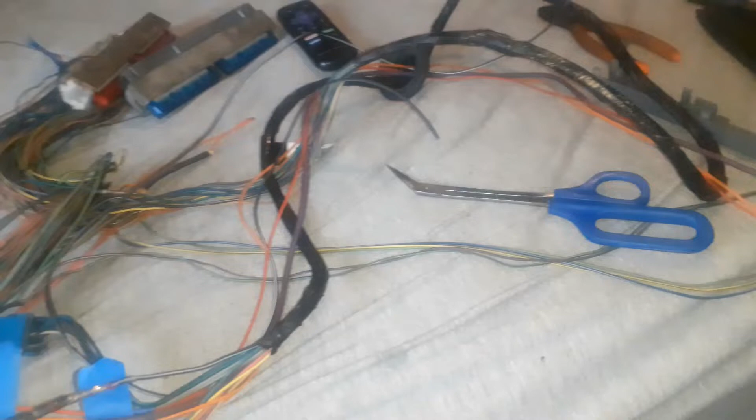Alright, so we're converting a 99 through 02 Camaro harness to work with a 96 LT1 Camaro.

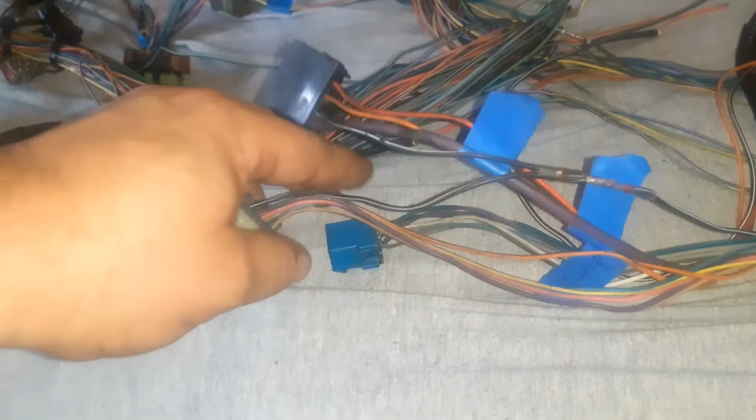Now, to get this to work, the LS harness only has 2 plugins. The LT1 has these plugins plus a black one underneath the dash. So you're going to have this black plug-in. I still had my LT1 harness, so I just took it off there.

So on the LS1 harness, there's this big purple wire, the starter wire. On the LS1 harness, it ran from the starter solenoid up to above the strut tower, shock tower, wheel well on the passenger side, up by these 3 plug-ins. It had its own plug-in that went to the engine bay fuse box, from what I'm assuming.

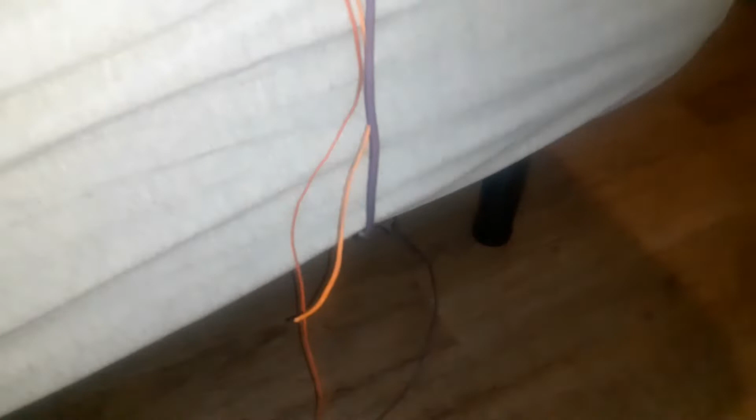That's not how the LT1 works. The LT1, the starter comes out from below the dash on this connector, which is pin A. I forget what that connector is called, but anyway. That purple wire goes straight to the starter solenoid. It comes up and around and down, and it goes straight to the starter solenoid. I just took it off my LT1 harness.

Now, there's a ground. This is the ground for the fuel pump. It just needs to be grounded, it doesn't matter where, but I just ran it in line with this ground. I don't know what that ground's for, it doesn't tell me, it just tells me it's a ground on the pinouts that I've looked up online.

Now there is a fuel pump relay. This is a fuel pump relay too, but on the LT1, it just went over to the strut tower, shock tower, wheel well on the passenger side and just hung out, so you could manually prime the fuel pump. This little thing right here is cool and good to have for trying to figure out fueling issues. So I'm going to keep that.

Now this orange one in pin C, this is the PCM bat. This is from the PCM bat fuse. It fed to the LT1 computer to feed it 12 volts.

So I grounded the fuel pump right there, I just grounded it with this one. All those grounds come up in this harness and they all meet, like right here. See, and they meet in this block and then they come out as one wire. There's even one wire coming out this side and going back. I don't know why they did that, but these grounds come up and then they go to these grounds that go to the back of the head. There were 3 of these.

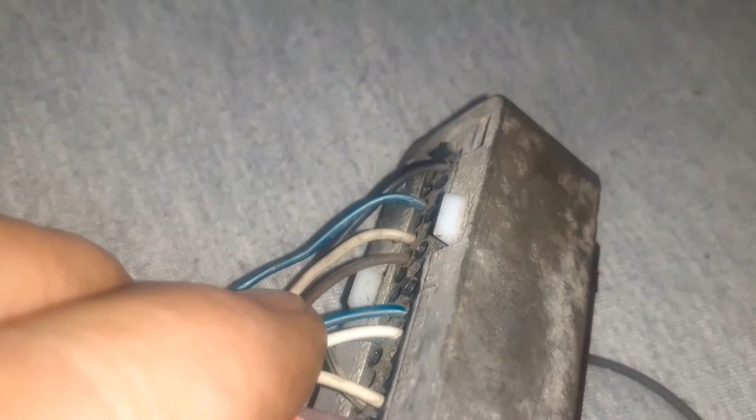All right, now, so to power the fuel pump, there's red pin 9, which is that green and white wire up beside the white one. It comes over here to pin D on this C101 connector that's on the LS1 harness.

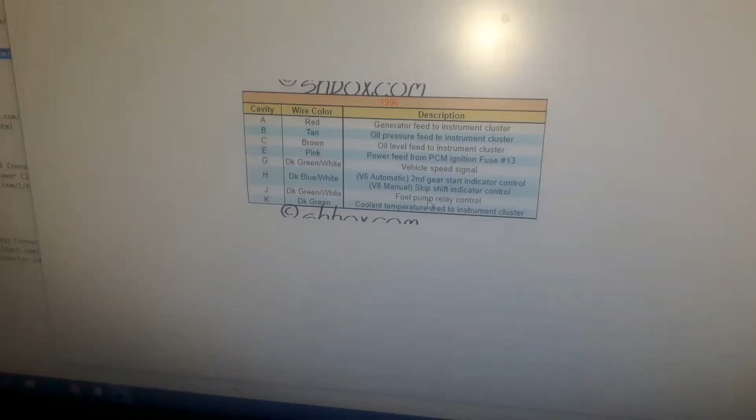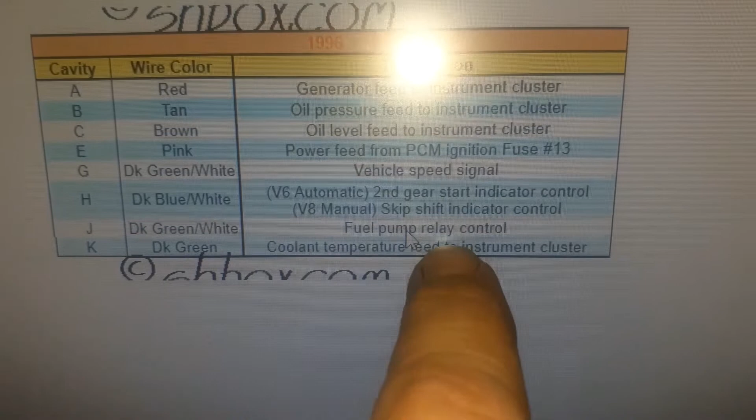So we need to take that wire, and it needs to come down to this wire. And let me see what our pinout says. One moment. It says it needs to go to C220, which is the white one. Dark green and white, J, fuel pump relay control.

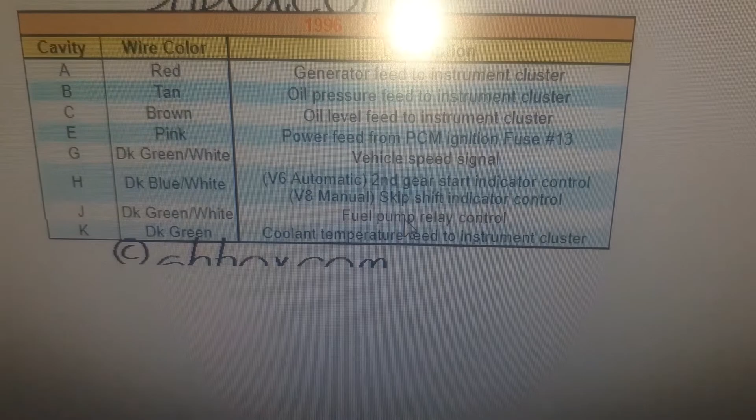So that's where we're going to send it. White J. Alright, so this is the C220, the white one. So we find J, and we're going to run this red pin 9 that goes to D, and C101, we're going to run it to J in this white connector.

So the J was the yellow with the black stripe. I found it on the under end of the harness. It's actually the only yellow wire in the bunch. So I found it coming out the other end right here, which is just all the harness. It wraps back out and all of them come out right there. So all these wires here, and this white and blue are all these wires right here.

So now this also went to C101. It went to one of the anti-theft things or something like that. And this is pin 9 from the red connector. So we're going to put those together, and that's going to match this up with the fuel pump relay. That's a fuel pump relay control. This one's a fuel pump relay control too. That red one. But yeah, let's connect those together real quick, and then we'll go to the next step.

Alright, C220 connector, white connector, J goes to pin 9 on the red connector. And both of these, pin 9 went to C101 originally, and so did J from the C220 went to C101. But all you need to know is pin 9 to white connector J.

And when you're doing the alphabet on these, because this plug-in gets in the way, this latch for the plug-in gets in the way, there is no I. So it's A, B, C, D, E on this side, and then F, G, H, J, K. So that's J. And then, yeah, let's see what's next.

I already found the oil pressure wire. So this one comes down, and we're going to try to find it down here. It's a light tannish brown wire. There it is. That's the only one right there, which is, let's zoom in on this. I can't see. That should be pin A. It is. So pin A. Alright, and we're just going to confirm that.

Something I wanted to mention here real quick. When you see these black diagrams right here, these are the diagrams for the LS harness itself. You'll see some pictures of just like this, but they're in solid white. Those are the ones for the LT1 car, for the car itself, the plugins under the dash and the ones on the shock tower and stuff like that. The main thing of this is you want to line up the LS harness with what's on the car so everything works right.

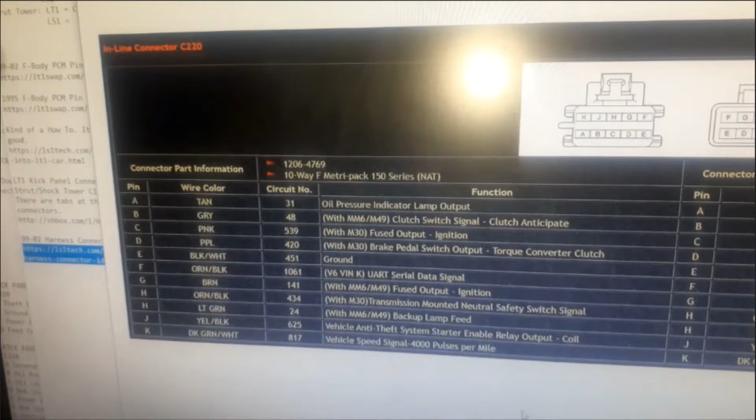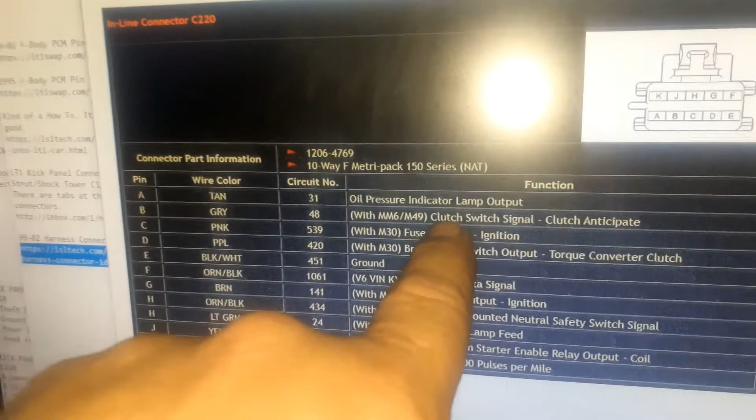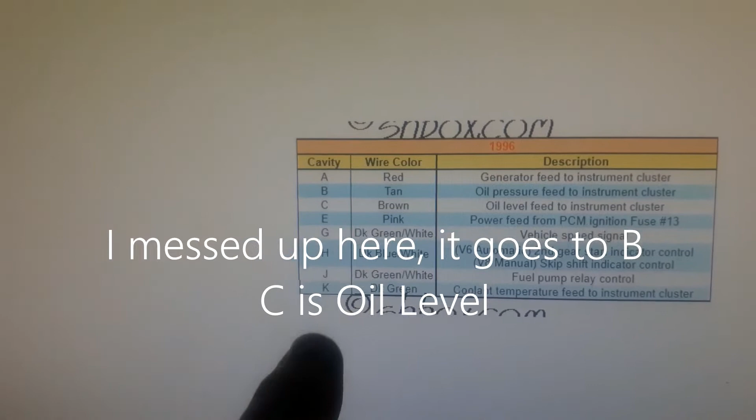C220, 10, oil pressure indicator lamp output. So we need that one. This is the C220. Let's turn this light off, that might help. So we need C220 oil pressure feed instrument cluster right there. We need to go that.

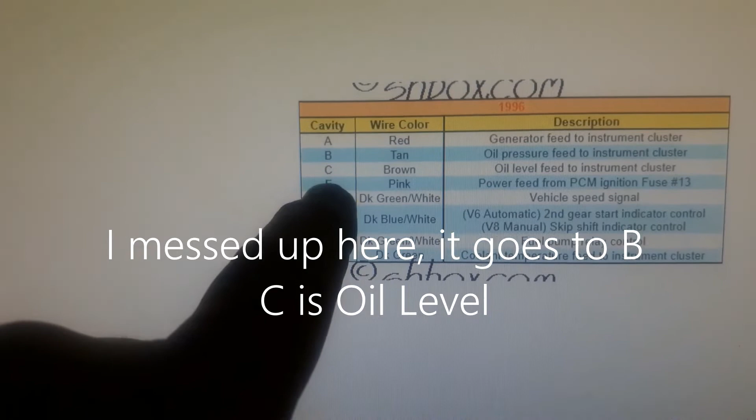We need to get that to go to C. So we need to move that from A to C, because that's the generator. So move that from A to C. Yeah, see, oil level feed to instrument cluster. Move A to C. Alright, since we're going to move this, we're just going to repin it. We're going to pop A out, pop C out, and flip those, or put A and C for now anyway.

Now to repin these, you got to take this gray thing off the top. There's little clamps on the side that you push in right here. Look, push in, disengage that, push this side in, it should pop out. So I'll push this side in, push this up, then push this side in, push that up, and that should. The lip is on the left side, so we need to push down on this left side, unclip it off that lip, see the lip in the blank hole, and then we can pull it through.

So I'm going to put a toothpick down in there, and I'm going to push it forward a little bit, and I'm going to push the toothpick down, and then I'm going to pull it back through. And I'm going to move A to C, which is our oil pressure. And then I don't know what we're going to do to C for now, but we'll figure that out later.

Alright, so now you get a better idea how that latched. I had to use a sewing needle. But there's the latch right there where my finger's pointing. And then down the big hole goes the prong from the other connector.

We're going to stick that in tan and C. So I messed up on the tan one. C is actually the oil level sensor, B is the oil pressure, so we need to move that over to B. Tan to B. Where do we take it from? A? Yeah, we took it from A, so oil pressure goes from A to B.

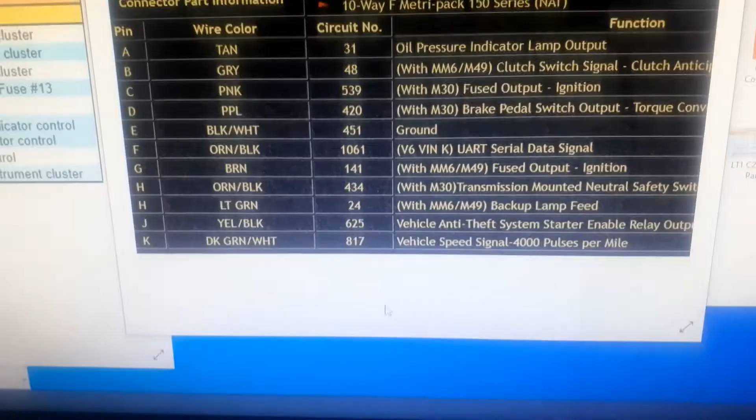My bad. Alright, we're still looking at the white under the dash connector, C220. And you'll see right here, dark green white, vehicle speed signal. Dark green white, and then over here, vehicle speed signal. So we need that to go to G. So K to G. And G is empty on this one, so we'll just take out K and move it over to G.

I really need that app where you can record your computer screen, but anyway, I took screenshots of all the connectors, C100, C101, C105, C220, and C230 for the LS, and then down here for the LT1, I took a screenshot, and this come from lt1swap.com. This come from shbox.com, shoebox, and I took a screenshot of the C100, C105, C210, C220, and C230 connectors.

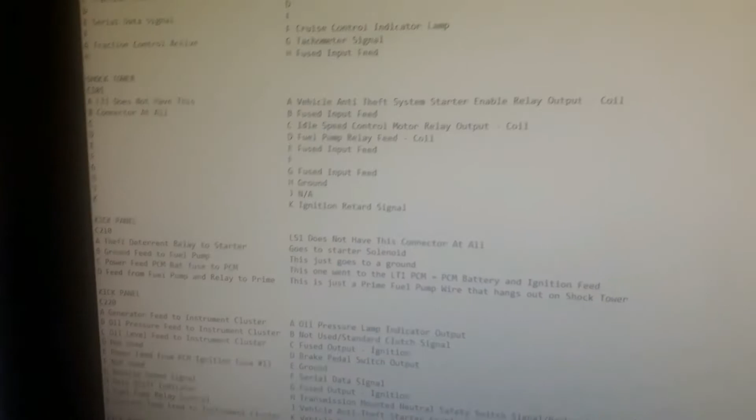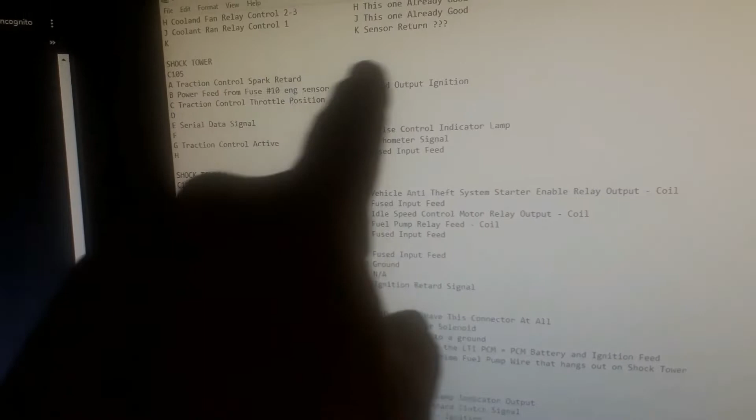And then, well, I know y'all can't see that, but then what I did was I made this little chart. So the left column's LT1, the right column's LS1. So C105, LT1, C105, LS1. I couldn't find the tach signal, so what I did, and I did that for all these connectors all the way down through here, was I did Control F and then typed in tach, and then boom, there we go.

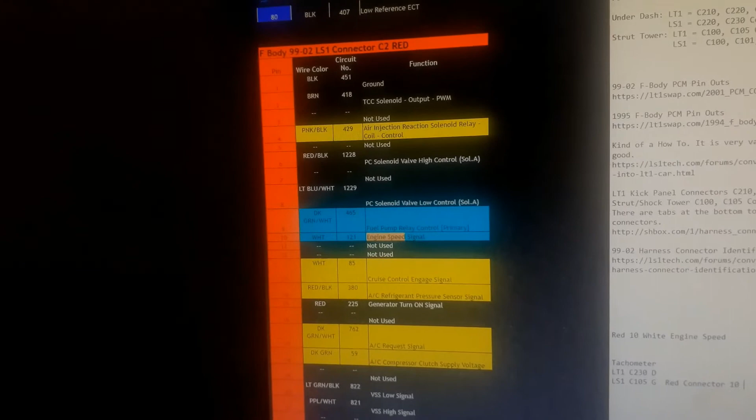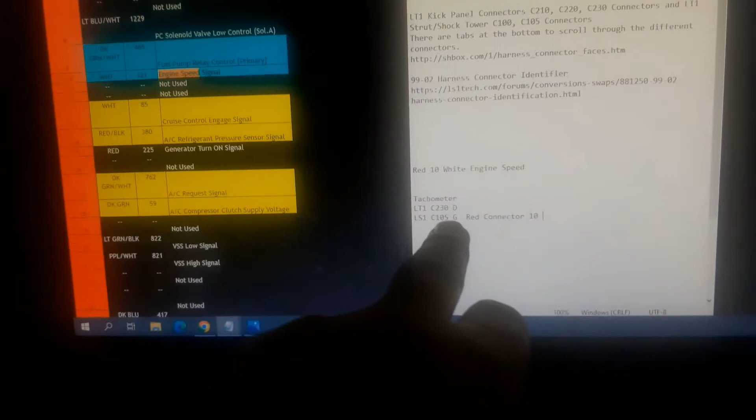And then I got the pinouts for the LS harness here. So it looks like red connector 10 is the engine speed signal. And then that goes to the C105 shock tower connector G. See if we can focus on that. And then it's red connector pin 10. So it goes from red connector pin 10 on LS1, then it goes to the C105 G.

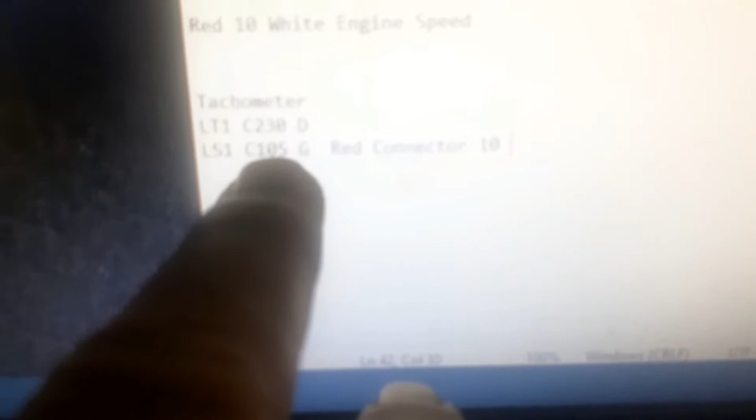So we need to take that out and run that to under the dash to C230D, which is the blue connector. So if we look at the red connector, and everything's always upside down, there it is. Red connector 10, it's supposed to have been a white. So that should go over to C105, and then we'll grab that and we'll trace it over and see if it does go to C105.

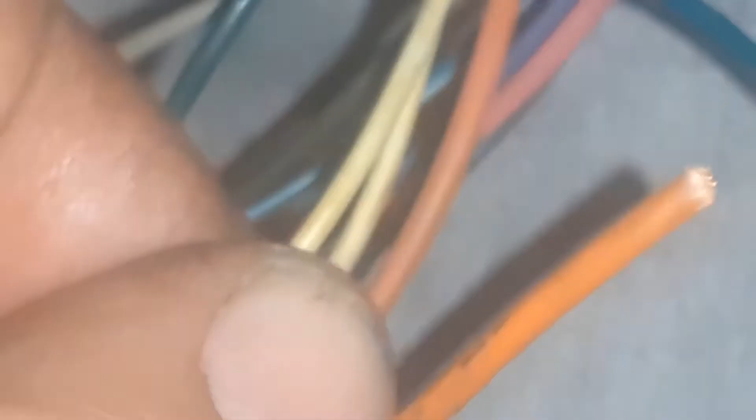Now I mark these right there, C105. There's two white connectors on here, but it was pin G, I believe. Is that what we said? Yeah, right there, pin G. So that one needs to run down to this blue connector.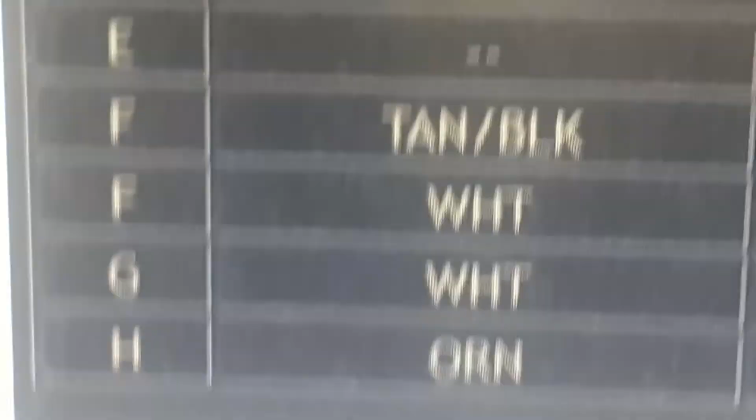And all these screenshots I took, this is the C105 connector for the LS. Right there, tachometer white G. And then the screenshot for the C230 blue on the LT1 under the dash harness. Where did it go? Right there. Tachometer instrument signal D, which is a white wire.

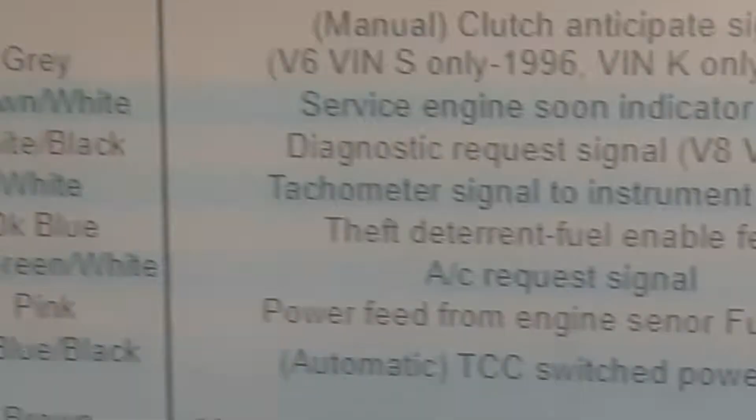So D white wire needs to go over to G on this one. Right there, G. We're just going to cut it right here. Alright, we just cut it out, because those pins ain't going to fit the other pins. I wouldn't think they would anyway. They might, it doesn't matter, the wire's not long enough.

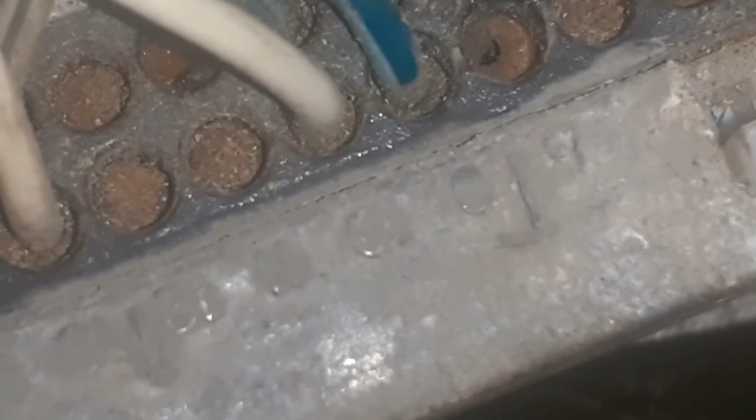But anyway, that's number 9. Just gotta check, and double check. It won't focus. Well, it focused for a minute. Number 9, or number 10. It was number 10, I'm sorry. Alright, so we got that.

Now we need to find the white connector in this one, and then trace it back, and we'll find it up here, where it comes out up here. And then we'll just splice it in here, it's just a little bit easier.

Alright, so the LS1 blue connector didn't have a pin D, so I took it out of my LT1 harness. And then red connector 10 right there. And then we're going to run this around from the blue connector D and hook it to that one, to red pin 10.

And that's for the tachometer signal. Alright, next thing to do is the engine coolant temp sensor.

Supposedly the 99 through 02 sensor reads differently than a 98 down. It just reads in a different way. On 99 through 02, it goes through the body control module or something like that. Anyway, a 98 down, and especially my 96, doesn't read that way.

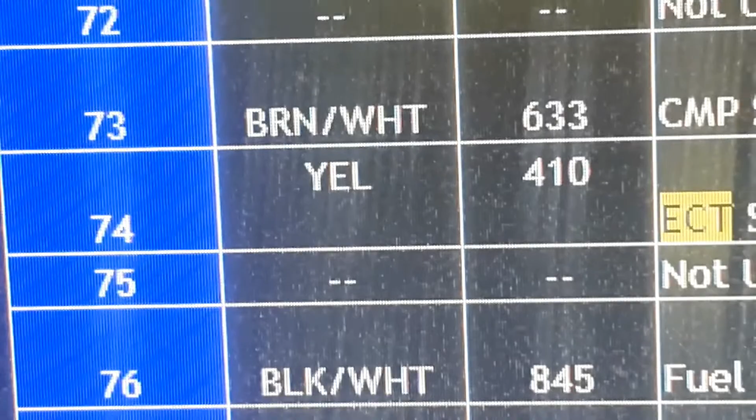Alright, so we trace that wire back, and that's 71, 72, 73, 74. It's that yellow wire right there. So that would be 74. Now let's look at the pinouts and see if that's in fact the engine coolant temperature. And then there we go, 74 yellow, engine coolant temp sensor signal.

So we have in fact confirmed that this is the engine coolant temp sensor, and I've already confirmed that, but check and double check. So we're going to go ahead and cut this one.

We're going to find A and B, get the 3-prong, line these wires back up with A and B, and then run a separate wire out of C. I'm just checking these off the old connector. So black is A, yellow is B.

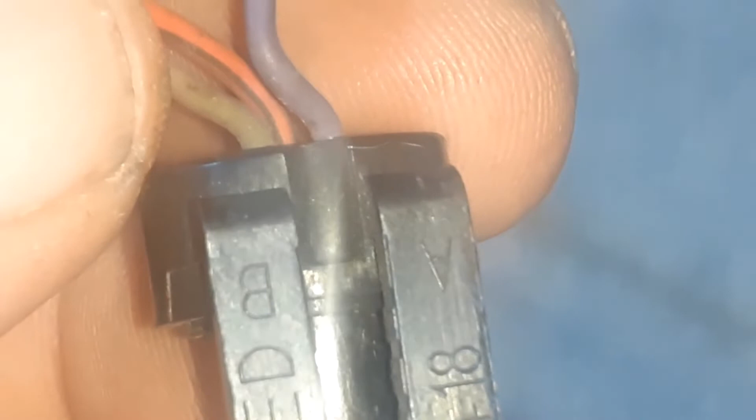Then on our new connector, B is this, I don't know what color that is, but it's this one right here. I just use these little connectors. I got these at Summit, but you just put one wire in this end, one wire in this end, make sure the wires overlap under this right here, the solder part where my thumb's at, and I just heat it up with a lighter, or you can use a heat gun, but I just use a lighter, and it melts all this, and it wraps the wire and solders it at the same time. Pretty cool.

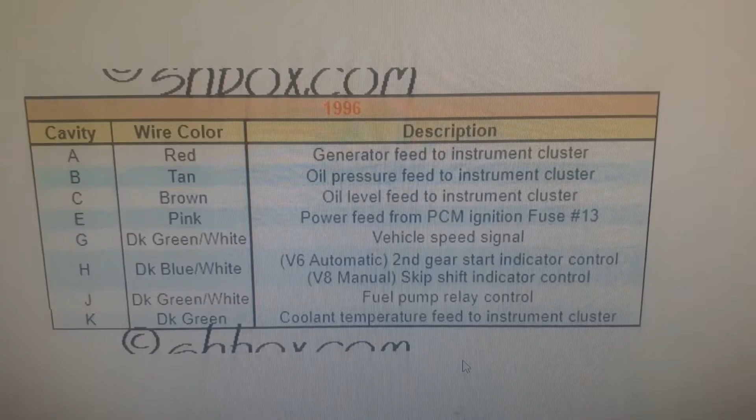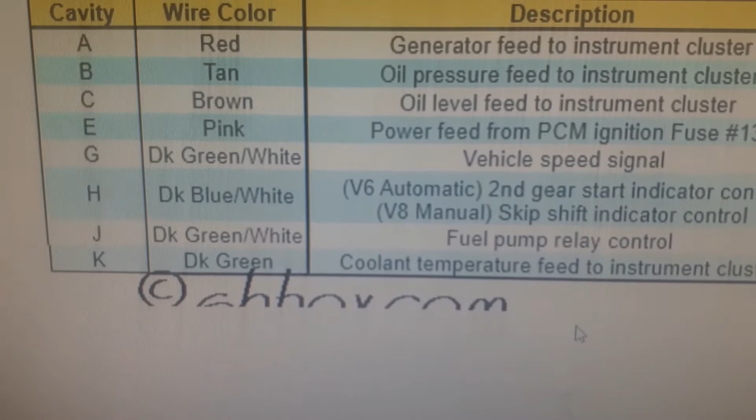And then looking at our pinout from shbox.com, short for shoebox, it looks like coolant temperature feed is K on C220, which is the white one. So we need to run that C from the engine coolant temp connector all the way down to the white K. So I'm going to have to grab some wire for that.

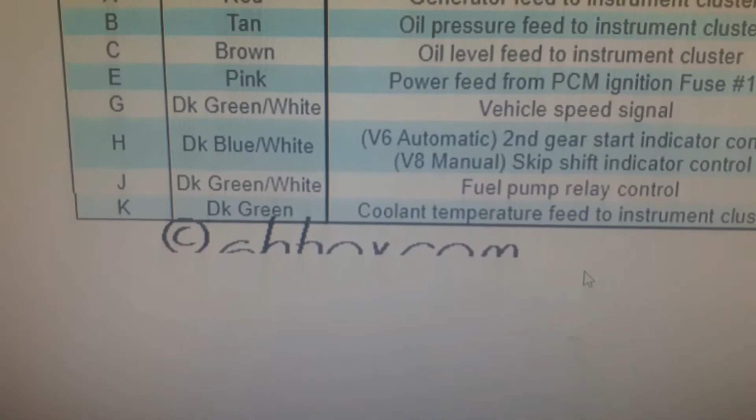Alright, so the C from the engine coolant temp sensor plug-in, that 3-prong that we put on, it's got to come all the way back here to K on C220. Now the LS1 C220 does not have a K.

So I stole this one off of the LT1 harness. So if you guys don't have a spare LT1 harness when you're doing this, you're going to have to get some of these. This is like 22, 24 gauge wire, and you're going to have to get some of these pins that fit these C220 and C230 connectors.

But anyway, I made the wire long enough that it's going to come all the way around. I had to use a couple of different wires because I'm just using leftover stuff from what I took off of this harness and from the LT1 harness.

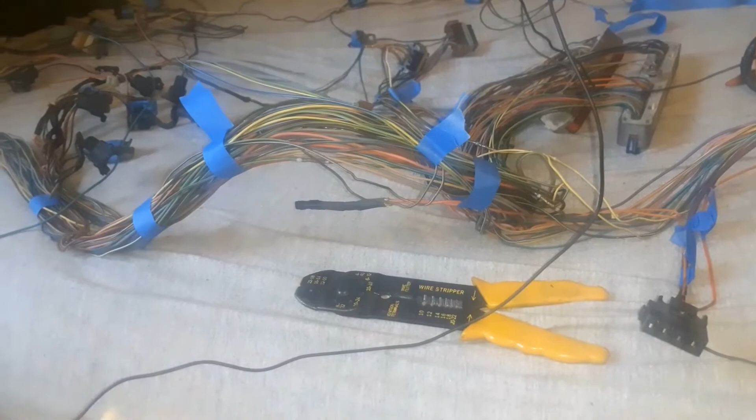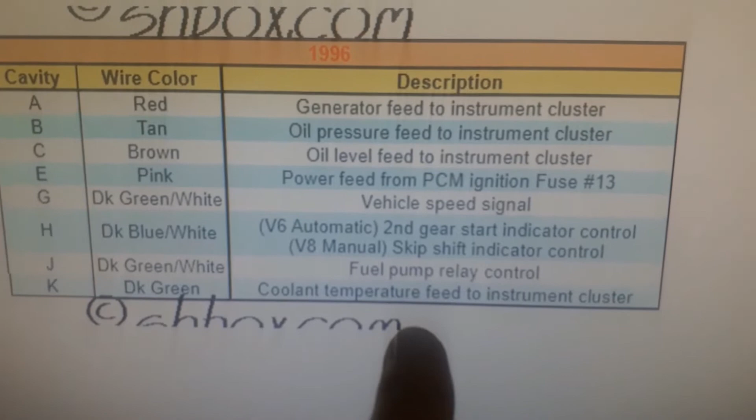So I'll put this in K. See, just cross-referencing K, coolant temperature feed to instrument cluster. So this is K under the dash, so we need to line it up with that one.

All right, we got that all wired in.

3-prong connector for engine coolant temp sensor. It looks like that: A to A and B to B from what was already on there, and then C at the bottom. You run all the way back around, down through here, back down to here, and then white C220K. Alright, that's the engine coolant temp sensor.

Alright, on the alternator wire, it's this red one. It comes all the way back around, and then it goes to red 15 on this connector. Now this one you have to splice into it because it still has to go to the computer, but it also needs to go to C220 pin A.

So we're going to run C220A and splice it into here. So it's going to go to the computer, to the connector on the alternator, and it's going to go down to C220 on A.

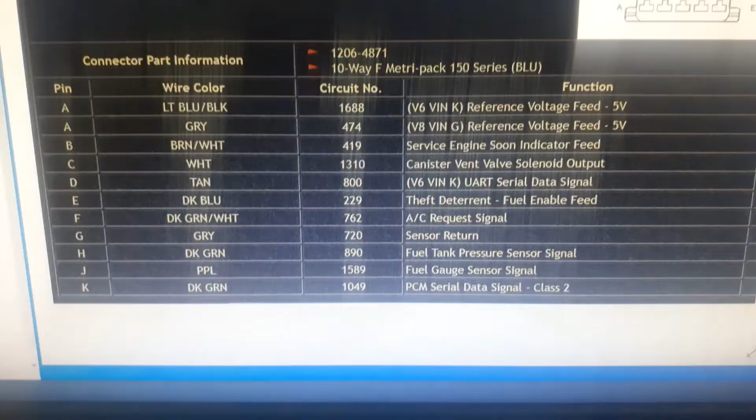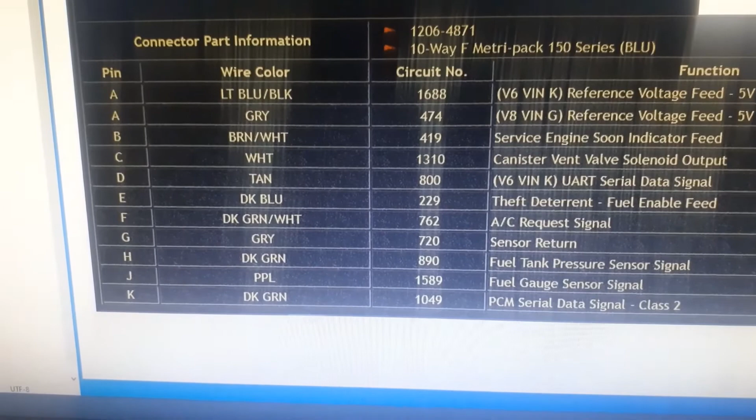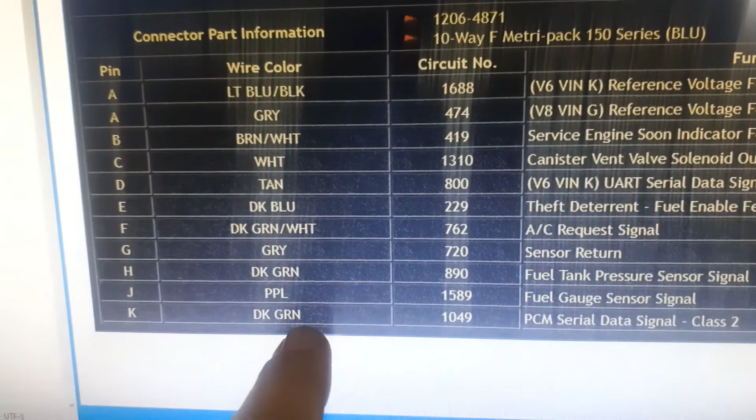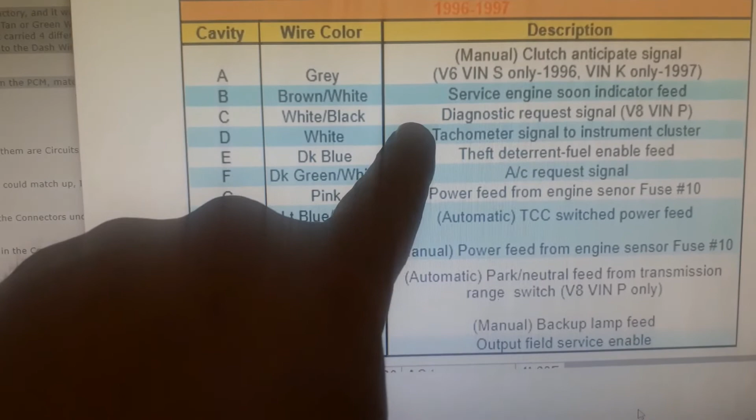Out of the blue connector on the PCM, 58, that's your serial data wire for your OBD diagnostic port to work. Now the 95, 96, and 97 LT1 have the OBD2, so you're pretty much set up on that except for this one wire. It goes from blue PCM connector 58, and then it comes to C230K. But now on the LT1, we need that on C230C. So we need to move K to C.

Alright, so blue connector PCM 58, I moved down here to C230 on connector C. There was one already plugged in there, so that was just for the emission stuff, so we'll leave that off.

Alright, so blue connector, these orange wires 20 and 57, they need to go to a constant power source. If you wire those around, it comes to this block. It comes out of this block and it goes up to C101.

So those need constant power. The only constant power I know is this PCM battery wire that went to the LT1. It went to 2 different spots: this orange one to power the PCM off this black connector that goes under the dash, the orange wire. So I'm going to cut this wire out that went to 20 and 57.

Alright, so basically what we're going to do here is we're going to run C210 black connector, pin C. We're going to run that up to blue connector 20 and 57. But like I said, these go together and then go over to this block and then come out and go up to this C101 connector right here.

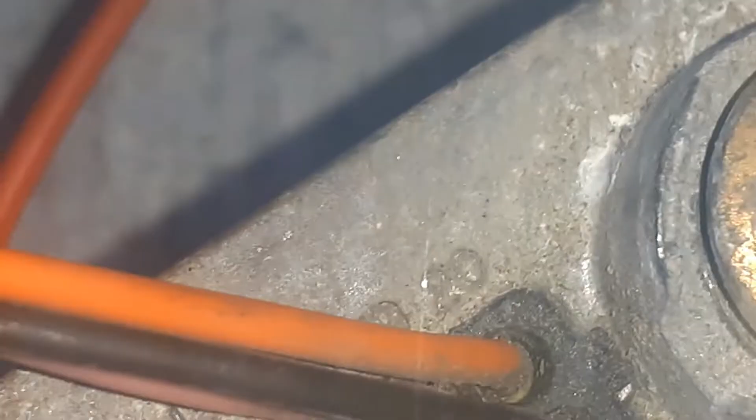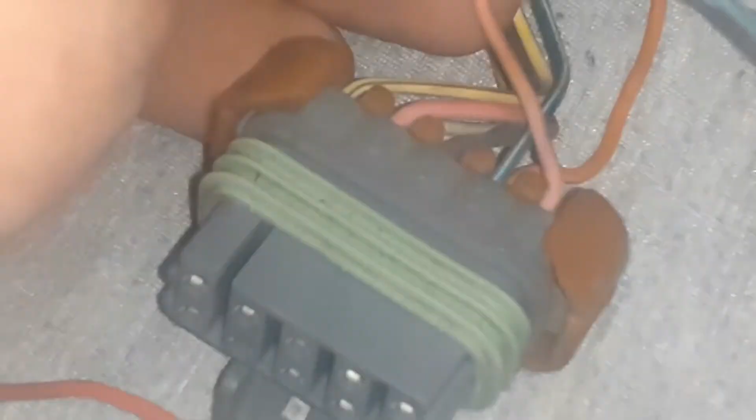Alright, the next one that needs power is 19, which is this pink wire. All the pink and orange wires are power. So let's figure out where that one goes. That one also went to this C101 connector, so we're going to cut that off, because remember the LT1 doesn't have the C101 connector.

Oh, also that blue 19 PCM, that's for the ignition, so it needs to be a switched power source. And we do have a switched power source down here in this white connector - it's E, the pink one. So we're probably going to move that one, move this pink wire to E, and then we're going to connect that to the pink wire where it comes out up here.

So blue connector 19 to C220, to C220E. Alright, I ran that to E, but I just left the pink one there on C.

I had this ground wire that I was running. It wasn't being used, so I'd already had it cut, so I just moved it over to E. I had to splice into that anyway and run it all the way around, but that's set up. And then I got rid of the C101 connector because there's nothing else left on here except for these two, and these were cruise control, so that's gone. That's good.

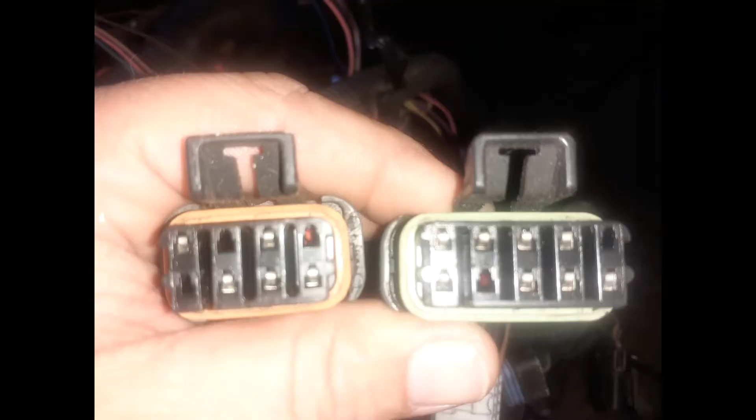So here are the 2 connectors that are needed on the wheel well, strut tower, shock tower, whatever you want to call that. The 10-pin one, that's the C100, and then the 8-pin one, that's the C105.

Alright, so I believe I left off, I haven't worked on this in a few days. I believe I left off on these connectors that connect on the passenger side, shock tower.

This is your C100. Now this one right here, pretty much all the connections match up to all the connections on the car on the LT1 C100, but this was a power wire, and it is on the LT1 car harness as well, but we ran this down under the dash.

And then the H and J right here and here, those do the fans, and it's the same as the LT1 harness.

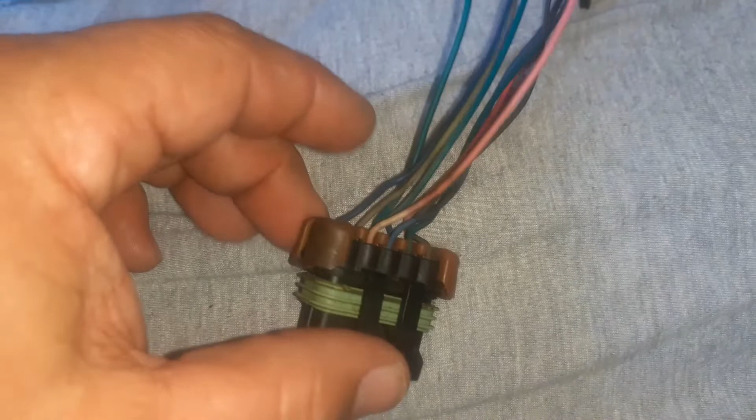Now, so we got this extra hot wire. It looks like there's only one hot wire on here that needs power. We could actually run that one over here, but we have to make those run to here.

So hopefully it looks like those pins will be the same, so we can just pin this around. And I also need to see what these are, but we need to get these and this, because the LT1 harness on the car, it don't have a C101. It only has a 105 8-pin and a 100, which is a 10-pin.

But this one's done, and we got an extra wire. The K can even be taken off of here, but the K on the LT1 harness, it don't go to nothing, so I'm just gonna leave that one on there.

But all the rest of these are all cut off except for the fans. Well, this one don't matter. That one's K, and there's H and J. And then a power source wire.

And then we have this extra power source wire, and that power source wire actually lines up with the harness in the LT1 harness as well, so we can use that extra if we need it. But we got to make sure that we supply everything with power. Typically, all these pink and red wires, and even the orange wires, mostly the pink and the orange, those are hot wires. They need to go to something.

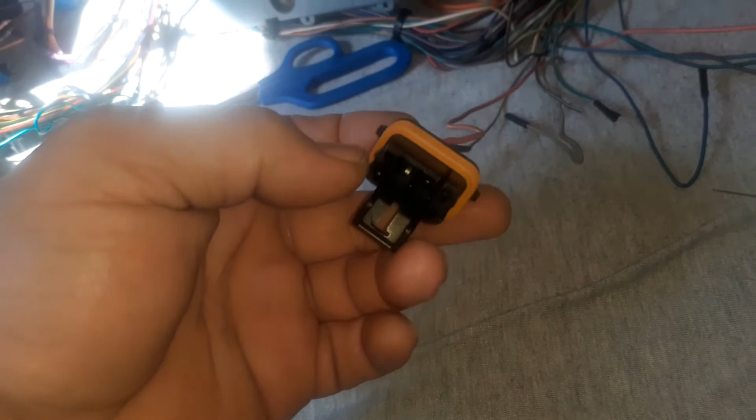All right, so basically what I did was I took the C101B and I put it in this 8-pin black connector for B, and that's our power. So really all I got running to the strut tower, shock tower, wheel well tower, whatever you want to call it, is a power wire there, a power wire there, and the fans.

I hooked the fans up anyway. Mine don't work. I've got something else wired in to control the fans, but I want to try to figure that out and get the computer working again. So everything else, this is cruise control stuff and a bunch of other stuff we're not going to use. But that's pretty much it.

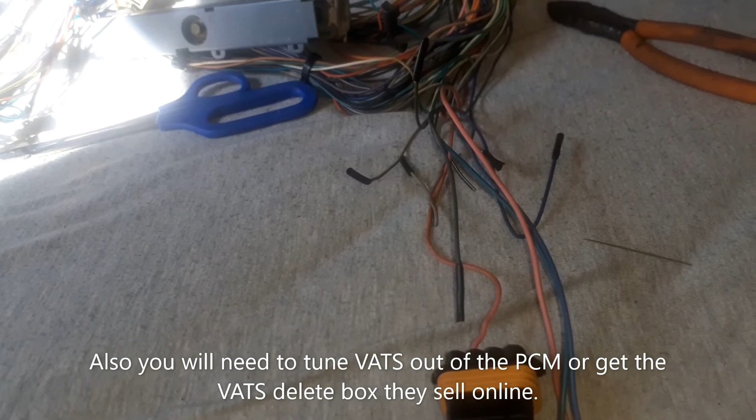I'm going to go put it on the car and see if it works. Now there is more to do if you're running the automatic transmission and stuff like that. But this is just bare bones for drag racing. I will drive it on the street, but not a whole lot.

But it's going to be open loop speed density tune. It's not using the O2 sensors, not using the MAF. I got a turbo 400 transmission, etc. So that's what I've got.